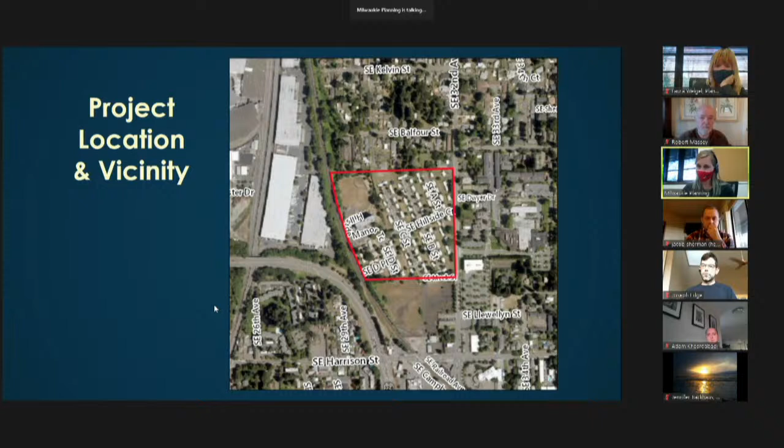The subject property is outlined here in red on the screen. It's located at 2889 Southeast Hillside Court. It's a neighborhood of predominantly single dwelling units located to the north. The campus of Providence Hospital is to the east. The vacant so-called Murphy site, the Murphy lumber site, is to the south. And the North Milwaukie industrial area, the Southern Pacific Rail Line, and Highway 224 are immediately to the west. The site is located in the Ardenwald neighborhood and is adjacent to the central Milwaukie portion of the city.

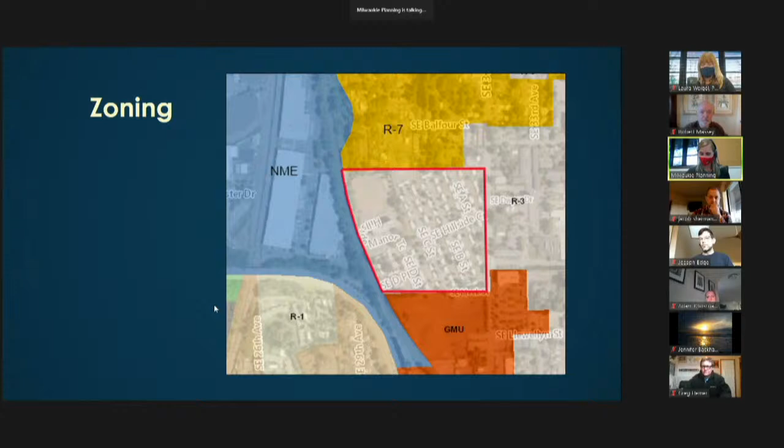The subject property, again outlined here in red, is zoned residential R3, which is a high-density residential zone, adjacent to the site of the R7 zone to the north, the general mixed use or GMU zone to the south, and the NME North Milwaukie employment zone to the west.

The proposal: this is the general master plan, site plan that was included in the staff report. The applicant is seeking land use approval to develop a mixed income community of a total of 600 units: 400 new units, 100 replacement units for the cottages that are on the site now, and then the existing 100 units in the Hillside Manor Tower, for a total of 600 units on the site. At the end of all phases of development, the applicant is using the planned development process, which allows greater flexibility in design than would otherwise be possible through the standards of the underlying R3 zone.

As described in the application materials, the existing houses in Hillside Park will be replaced with 100 new affordable units for the population currently being served on the site. Removing the existing houses creates the opportunity to develop 400 residential units that will include a mix of both affordable and market rate housing. The new units will provide a variety of housing choices. So the proposal includes walk-up townhomes in the northern part of the site adjacent to the R7 zone to the north.

And then also including 3- and 4-story mixed income apartment buildings to the south. In addition to the residential development, the proposal includes opportunities for small scale commercial and office uses on the ground floor of the buildings along 32nd Avenue, and those are identified there to the side.

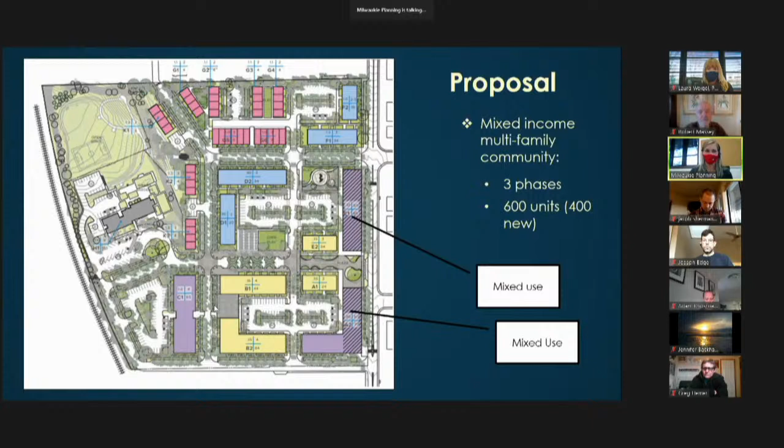The master plan includes subdividing the property into smaller lots to facilitate phased development and provides the opportunity for development of lots by outside partners. I'll get into a little more detail of that here.

So the phasing plan: the proposed redevelopment on the site will involve the phased demolition of existing improvements on the site, including removal of structures, demolition of the existing roads, and removal or abandonment of the underground infrastructure.

A new street grid and infrastructure plan is proposed with the streets to be realigned, so it's more of a grid and block system.

The phasing plan includes assisting the current Hillside Park residents with relocation into one of the new units upon completion. The first phase anticipates the Housing Authority developing at least 100 replacement units that will be leased to low-income residents.

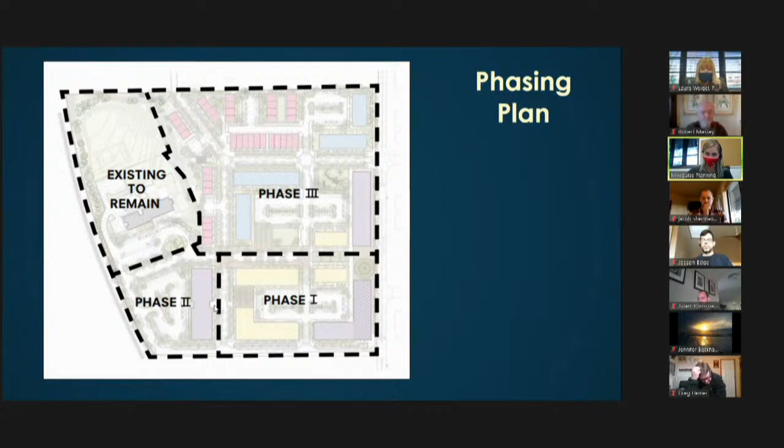Part of this proposal includes a proposed rezoning of the property. In order to reach the density goals and allow for mixed-use development, the final development plan and program includes a request to change the zoning and the comprehensive plan designation of the property.

The northern portion of the site is proposed to have a zoning of R1 and a comprehensive plan designation of high-density residential. The southern portion of the site is proposed as GMU, or general mixed use, with a comp plan designation of town center, consistent with the property directly to the south across Meek Street.

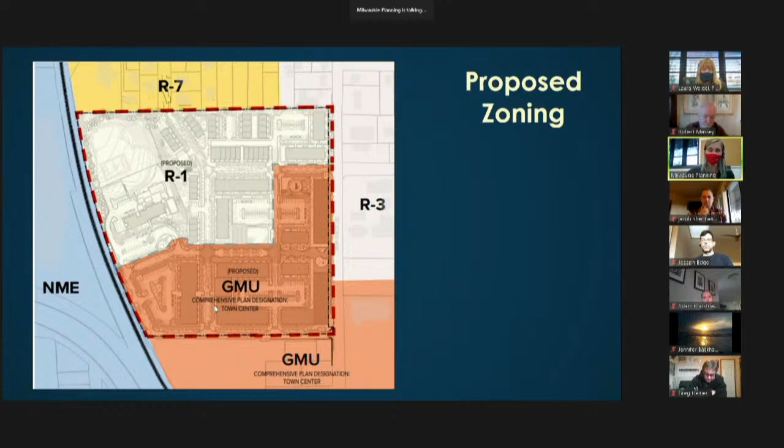So this map shows what the proposed zoning would be. And again, the current site is zoned R3, so they're proposing a split zone on the site.

The applicant is, again, seeking land use approval to develop this 600-unit apartment community with some mixed-use buildings, and they're using the planned development process.

The planned development, land use file PD 2020-002, allows for adjustments in lot sizes, lot dimensions, and some development standards. For the preliminary development plan and program, which is the proposal and the hearing that we're having this evening, is an approval in principle.

Which is what is laid out in the code in section 311. And that's required to move forward for a final development plan and program, which will include a review of the requested zone changes. So that's why we're in a preliminary planned development review right now.

As part of this review, we are also conducting a transportation facilities review. The project's impacts on transportation, both including vehicular, bicycle, and pedestrian, have to be evaluated to determine whether improvements to the transportation system are warranted.

So the applicant submitted the preliminary development plan and program, which is being processed as a type 3 application for the purposes of noticing and establishing a review by the Planning Commission.

And again, if they are successful and the commission approves in principle of the preliminary plan development, then the applicant will have to initiate a type 4 review process by submitting a final development plan along with the proposed subdivision and any other applicable reviews within 18 months of the approval.

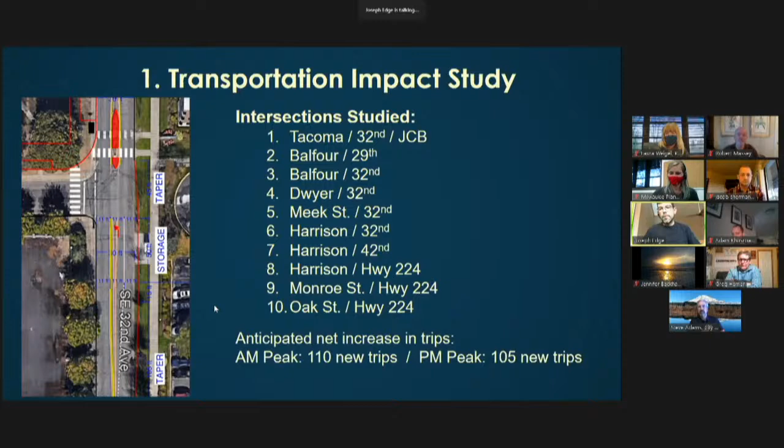Thank you, Commissioner Sherman. Are there any other questions for Mr. Adams before we move on? Okay, thank you. All right, thanks very much.

We'll continue on. The next key issue is whether or not the application meets the requirements and approval criteria for section 311. So this slide summarizes a couple of the items or features of the project.

Generally, what the applicant is seeking to do is to blend the density across the site. Although there are two zones, the R1 and the GMU zoning, the blended density overall on the site is 41 dwelling units an acre, which fits between the density spectrum of the R1 and the GMU zoning. So it skews a little bit more towards the GMU, but it's within the range of densities for both.

The proposal is, as you can see in the graphic, the higher density development is towards the south. The lower density R1 kind of development, the townhomes and so on, are towards the north, adjacent to the single unit dwelling neighborhood in the R7. Then as it moves towards the south, adjacent to the existing GMU zone, the existing Murphy site, and as you progress closer into the Harrison and 32nd Ave intersection, that's where the higher density development is being proposed.

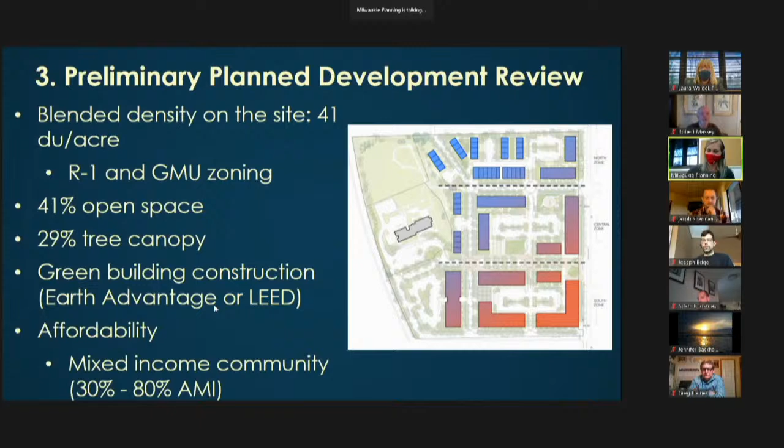So they are asking to modify the setbacks to allow for a more uniform development pattern towards the north, but they are still maintaining the 15-foot setback to the R7 zone to the north. So they would be maintaining that part. It's all the interior setbacks.

They've asked for some modifications in what kinds of materials are permitted as primary materials for the buildings, and as part of their application, they are looking to reduce the minimum parking requirements on the site, asking for an overall parking ratio of 0.8 spaces per unit, which does include the on-street spaces they're proposing as part of the overall development proposal.

There's a fairly extensive TDM program, or transportation demand management program, that they've described in their application materials, which talks about a variety of things including using transit, and they have a number of ideas about how they want to make sure that folks aren't necessarily relying on vehicle use.

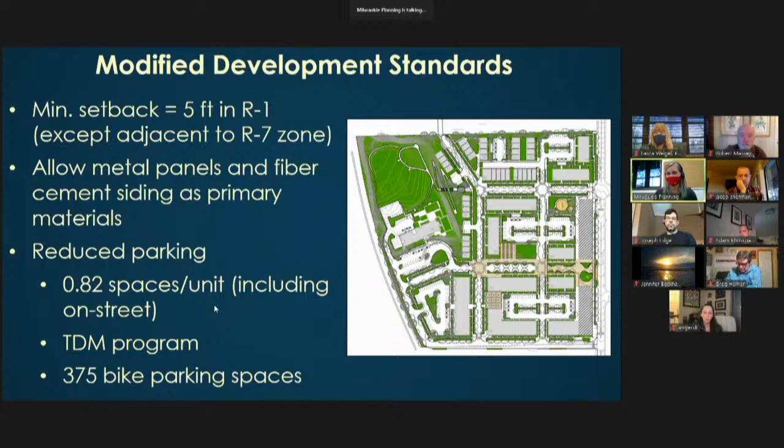And they are proposing 375 bike parking spaces throughout the development. That is less than the one per unit, but they are scattered throughout the development. So that's part of their overall proposal, a generally reduced parking ratio for the overall site.

Is the proposed amendment and the proposed project compatible with the surrounding neighborhood? So we're looking at compatibility both with the surrounding area and the land use pattern and density in the area. Is there a demonstrated need for the uses and for the project? Does the proposal demonstrate that it addresses a public purpose and provides public benefits or amenities beyond what would be provided in the base zone?

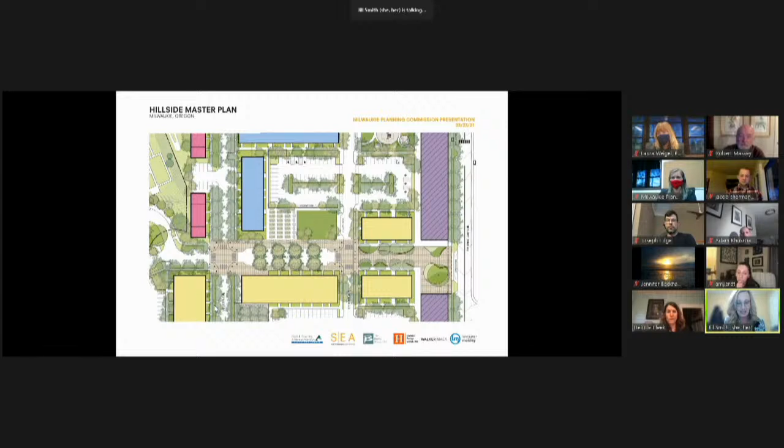And we have this amazing vision, which you've seen. I'm going to turn it over to Devin, our Interim Director of Development who works with me at the Housing Authority, to take you into a little bit of understanding the need that we're describing.

Hi, thank you for having me this evening. As Jill mentioned, I'm Devin Ellen, Interim Director of Housing Development with the Housing Authority of Clackamas County. My address is 6377 Southeast Yamhill Street, Portland, 97215.

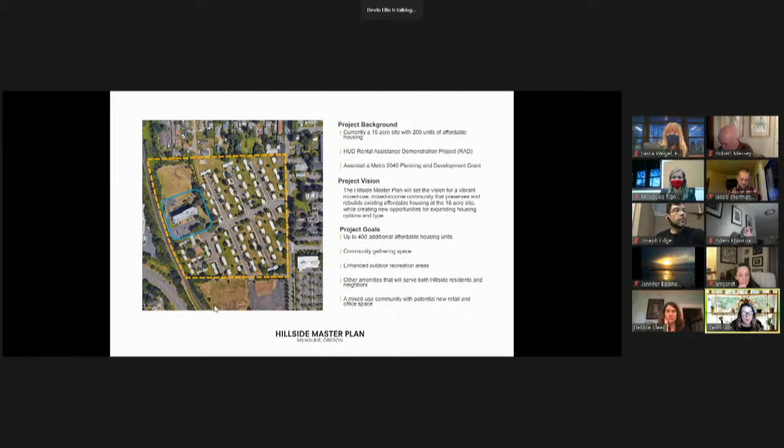So Ryan, can you advance the slide? The need for affordable housing in Clackamas County is considerable and continues to grow. The Housing Authority opened our waiting list for just 4 days last June, and we received over 13,000 applicants for only 1,200 spots on our waiting list.

According to the City of Milwaukie's 2019 Housing and Residential Land Assessment, an estimated 37% of Milwaukie households are cost burdened, meaning they currently pay more than 30% of their income towards housing costs. 27% of Milwaukie's renter households are severely cost burdened, meaning they pay more than 50% of their monthly income on rent.

According to data compiled from the county's 2019 Regional Housing Needs Analysis, over the next 20 years the City of Milwaukie needs nearly 700 new rental units affordable to households at 80% of the area median income and below. That equates to an annual income of $59,000 or less for a 2-person household. Countywide, we need an estimated 10,527 new units. All that to say, the need for affordable housing in Clackamas County cannot be understated.

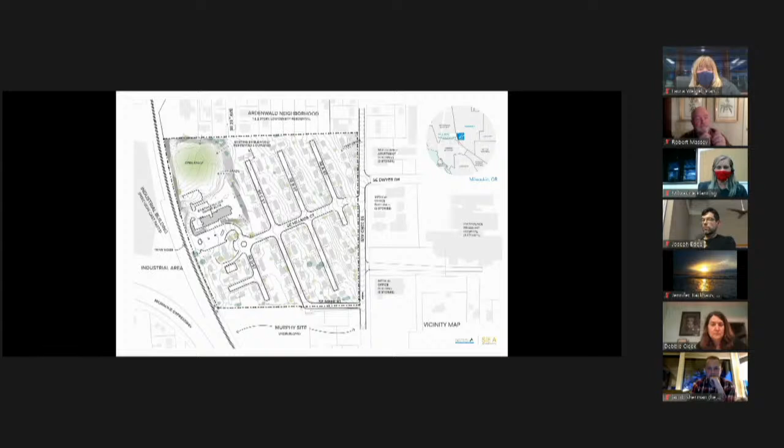Just a brief overview of the site. We're here at our Hillside Manor, on a rotated grid. We have the Ardenwald neighborhood to our north, Murphy to the south, industrial to the west, and Providence along with some multi-family apartment buildings and medical office buildings to the east.

The existing conditions of Hillside are this: we have a rotated grid that runs east-west across the site, with small houses in the park. Utilities are a mixed bag - some run along the streets, like the gas and electric, domestic water. However, the sanitary sewer runs in between the houses, and that was one of the existing conditions that presented a challenge to developing the site. We quickly realized we couldn't use the existing utilities, so a full redevelopment of the site was necessitated.

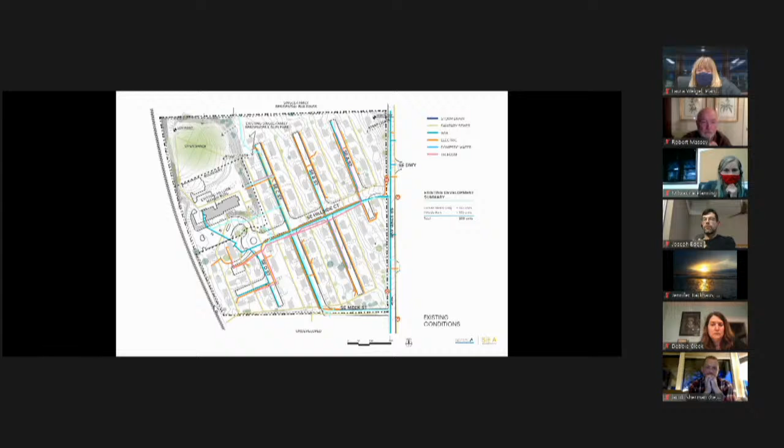So then we arrive at our master plan. The master plan is a really great opportunity to redevelop this site. The first item is that we're providing 3 times the amount of housing units that are currently supported on the site - there are currently 200, and when this project is completed, there will be 600 on site.

The other feature about this is that it is a planned development. If this site were left to be developed without this intense coordination of all the different buildings, spaces, roads, and utilities, it likely would not be as pleasant to be in, and it would be very much uncoordinated. So by using this planned development process, we really capitalize on the highly coordinated act of getting all these different project types and buildings to work together in a cohesive urban fabric.

One of the things that is really great about this site is that it does reintroduce the grid back into the city fabric. That provides easier, safer connections at intersections, and it's easier to manage and navigate for people walking, driving, or biking as well.

One of the great things this plan provides is a variety of housing choices for people that were not there prior to this plan. The pink buildings you see are townhouses - they're meant for families, low density, small buildings, and really relate well to the development of residential to the north that's already existing. The blue buildings are walk-up apartment buildings, they still have a residential look with gabled roofs and everything, but have more density.

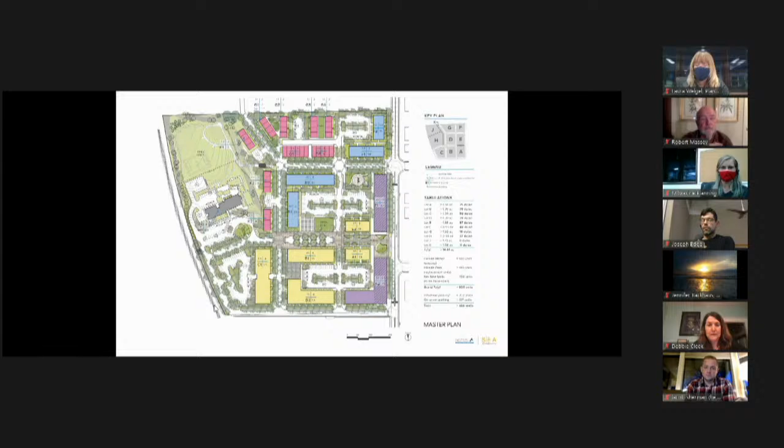As Debbie mentioned, our strategy is that these are all public streets, therefore they divide the lots up into different parcels that can be developed by individual developers. They're still held to the master plan form that we've shown earlier.

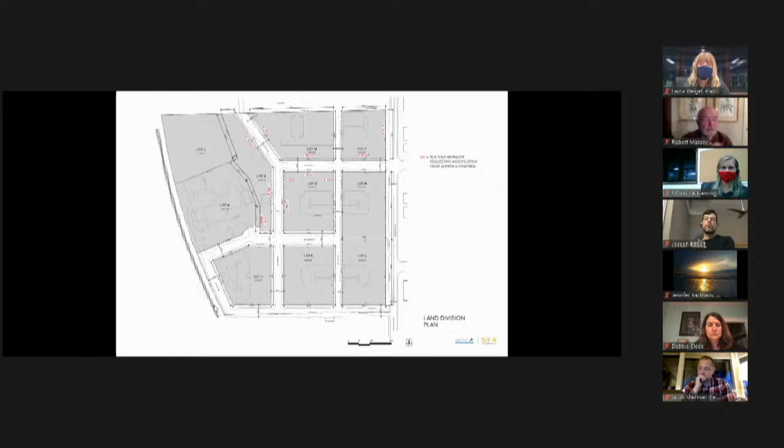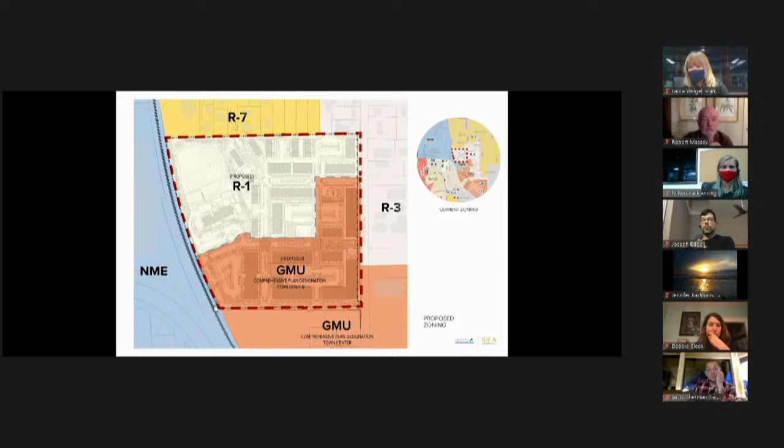We're also proposing to split the site, as you can see here, to the north and have the R1 zoning adjacent to the R7. And that supports our density in that zone.

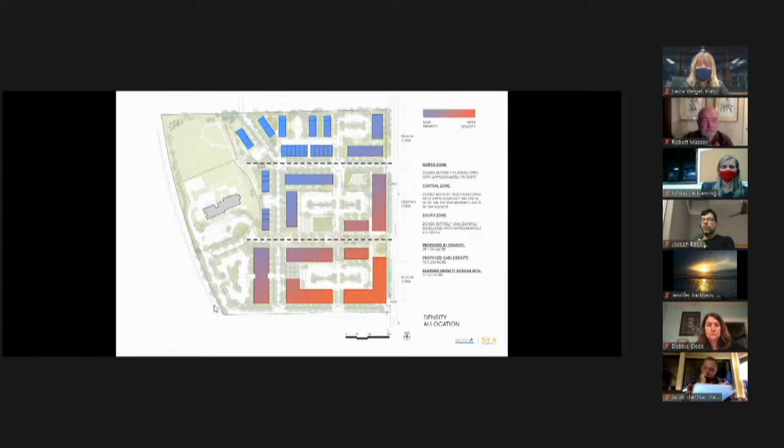It also supports some of the sustainability goals the city has, such as including a 40% tree canopy citywide, and we took that mandate and applied it to our site. So some of this open space is there to support the amount of trees we're going to include on the site to meet that goal.

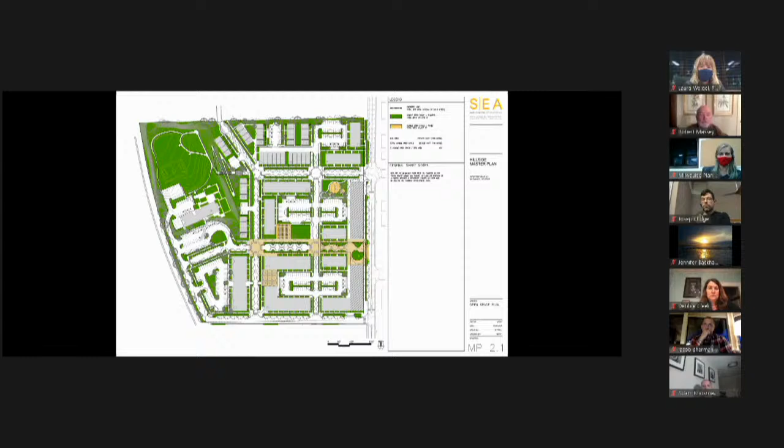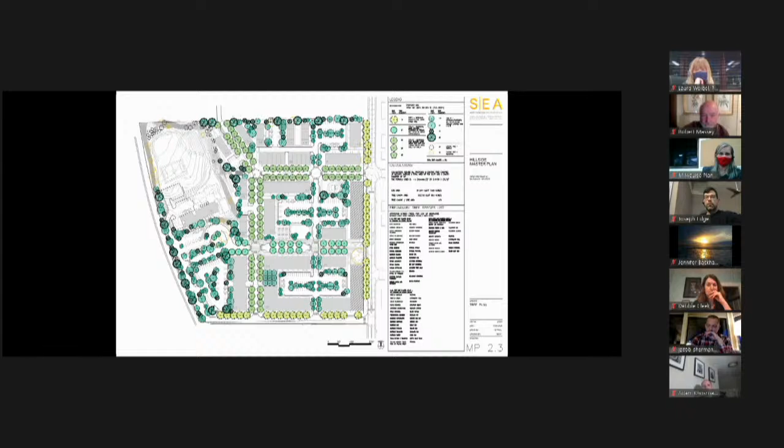In the parking fields, those are unique in that they're not limited to one species of tree—there'll be several different ones, so we encourage a more diverse culture of trees there rather than a singular monoculture. We're doing a lot to promote a place people will feel proud of, and these trees will be maintained by the city, so they'll have to meet standards for the width and size they're intended to be.

There are alternate options for developers who say they can't meet the stormwater requirements. They have the option to submerge a detention system underneath the parking field behind their building.

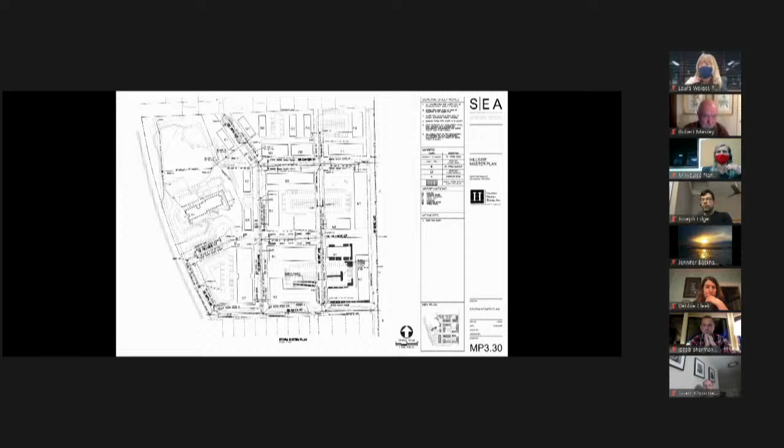And while I'm here, I'll clear up that we made an error in the application—there is no intended bike lane on 32nd Street. We did, however, dedicate a large amount of property in the right of way to include parallel parking along 32nd Street, and we do have a wide planter there and an 8-foot sidewalk. I just wanted to clear that up.

One other great thing is the amount of public improvements on this site. As Steve talked about before, we're upgrading the 32nd and Meek intersection to include a left turn lane, which will reduce northbound traffic frustration on that street, something we've heard a lot about in comments. These are all new roads, all new public roads, curbs, and utilities—a tremendous benefit to the public. Also, the introduction of the grid back into the project will make those intersections safer as well.

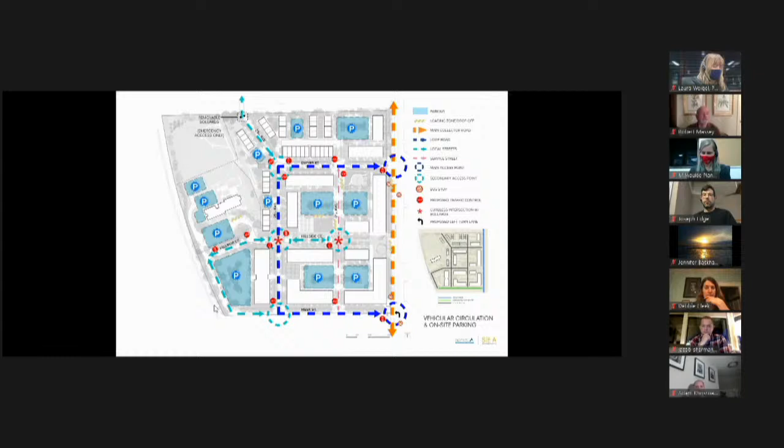So we've made specific turnouts for those places to happen. They're never reserved, they're first come, first served, but they are dedicated for that purpose.

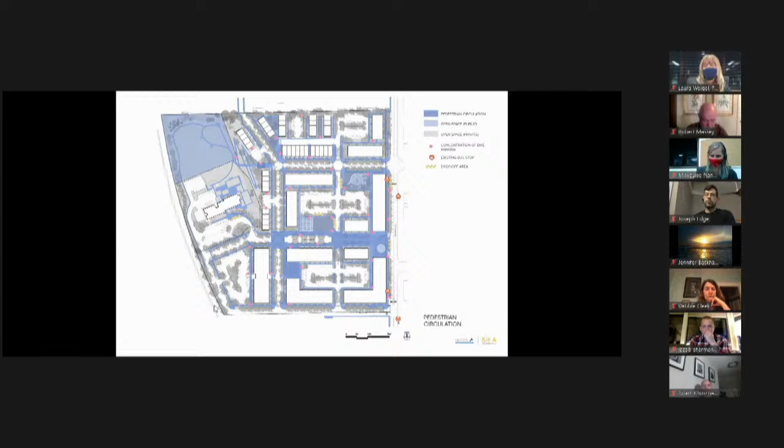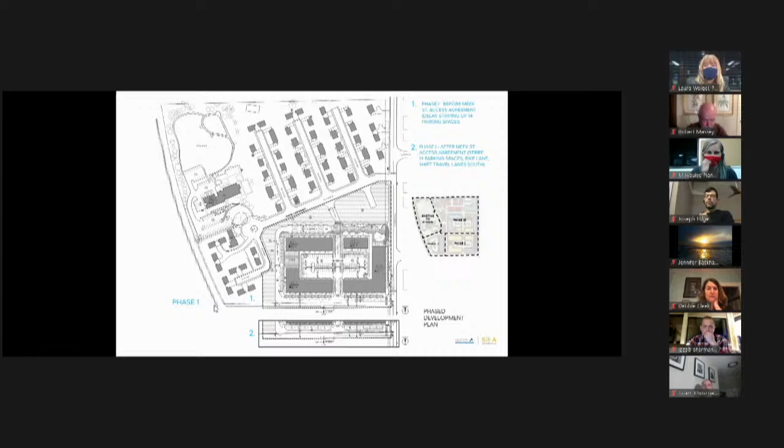Briefly, the way this master plan works, it allows us a lot of flexibility in the phasing. In the first phase, we can possibly sell Lot A for the capital improvements we need to make to the site. Lot B is the replacement housing for residents in the park who are being displaced. Then we can make a clean break to the Hillside Court up at the north part of this diagram to allow some flex between phase 1 and when phase 2 or 3 starts, because we know there are some options available for which buildings happen in phase 2 and 3.

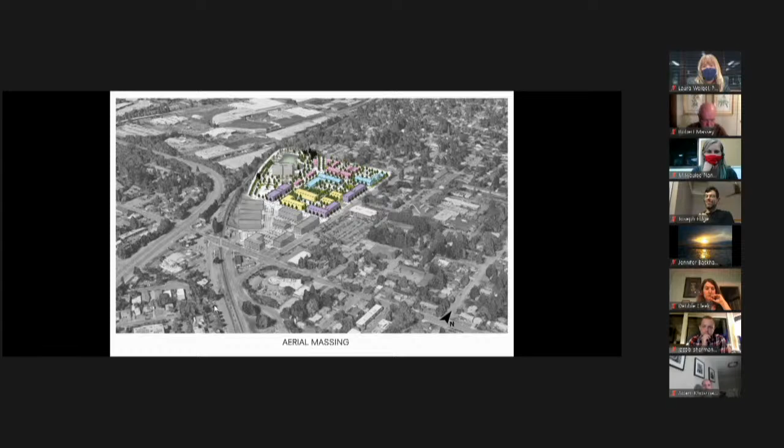Now I'll turn it over to Debbie, who's going to talk about some of our anticipated modifications that we'll be requesting. Thanks, Ryan. We'll go through this pretty quickly because I know you want to move on.

But this is a conceptual approval, and because of that, we want to use this opportunity to have the commission weigh in on a number of key aspects of the master plan to make sure we're headed in the right direction. As Vera mentioned earlier, we're requesting several modifications to the development standards of the code to make the master plan happen, and we want to zoom in on a couple of those and discuss them in detail so the commission has a good understanding of what we're proposing.

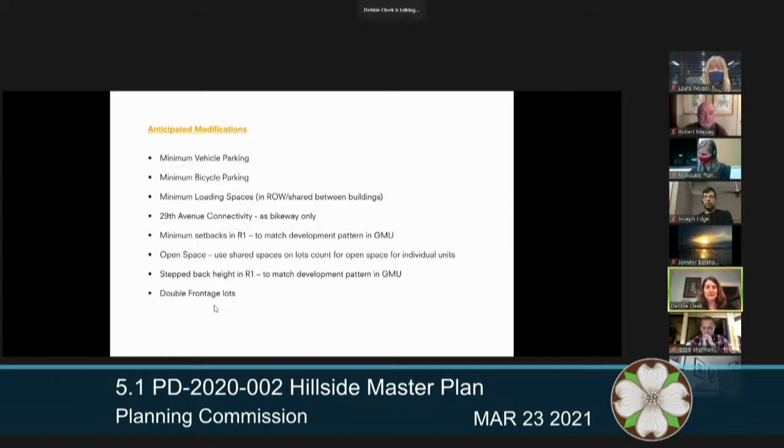We're going to look at the minimum vehicle parking, the minimum bicycle parking, and the 29th Avenue connectivity. Next slide, Ryan.

On the vehicle parking modification, the goal is to provide adequate parking without overparking the site and taking away a lot of the open space that's a real amenity to the site. So we've looked at several different ways to reduce the parking below what's required by the code minimums.

Some of those are reductions that are by right, which is that the Hillside Manor is vested with 59 existing parking spaces. Also, the entire site is located close to public transit, which gives us an automatic 20% reduction across the site. But then the modification we're requesting is to look at other mechanisms to reduce the number of required parking spaces.

This includes compensating for the fact that it's affordable housing. The ITE, which is the transportation engineers' go-to, has a 25% reduction for affordable housing.

We're also looking at sharing the parking between the commercial uses and the residential uses because they have opposite peak hours of use, so they make a nice complement for each other. There are also 137 on-street interior parking spaces within the development that we'd like to have counted towards our parking minimum—that would include all the parking spaces except on 32nd Avenue. We've asked the city to consider having the spaces on 32nd Avenue signed for short period parking, like 2-hour parking, so those would be more focused towards commercial use and less for overnight residential parking.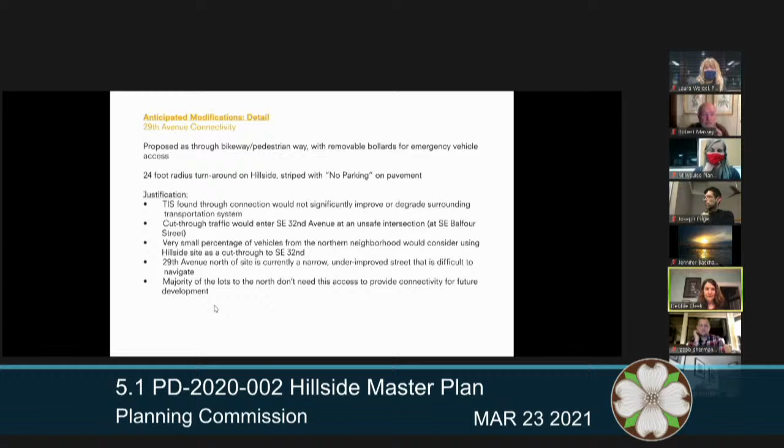Oh, I don't think that's the right slide. Well, anyway, I will just use this slide.

The last thing we would like clear input from the Planning Commission on is that we are headed in the right direction with the zoning and the comp plan designations and the density we've proposed on the site. If you remember the zoning slide, we're doing GMU on the south half of the site and R1 on the north half of the site.

We feel these zones are compatible with what's going on in the existing area. There isn't one single strong character of this neighborhood. You've got industrial to the east, medical centers and commercial uses to the west, GMU zoning on an undeveloped site to the south, and single family residential to the north. So it's a site that pulls all these disparate uses together.

We think the zonings we've picked take into account that there's a lot of different things going on in this neighborhood. It's also consistent with the Central Milwaukie Land Use and Transportation Plan that was recently approved. Our site wasn't included in that plan, but it did include the Murphy site and added GMU zoning to that site. So we think having more dense units on the south part of our site will fold in nicely with that plan.

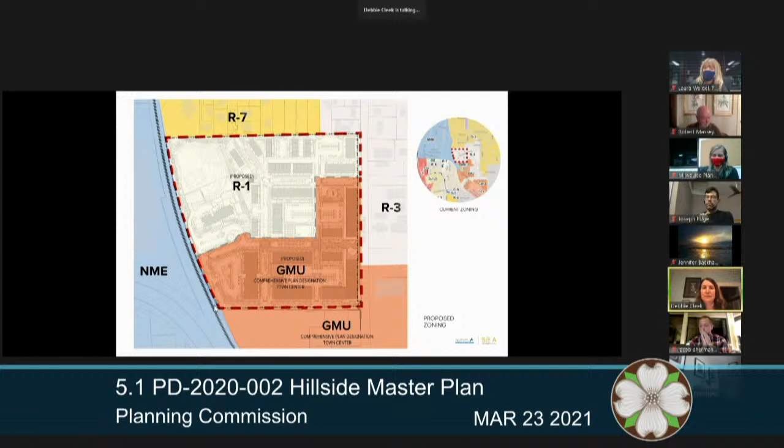So that pretty much concludes what we were hoping to have your input on, and we're looking forward to hearing your discussion.

Are there any questions from the commissioners for the applicant's representatives? Commissioner Khosroabadi.

Thank you. I appreciate your time and your presentation. Very well done, and I like the design of this building. A couple questions I had, and I know this isn't in the plans right now, but just thinking forward, the potential for solar on the buildings to make this building even more efficient and self-reliant, is that something that's been tossed around or thought about for future plans?

And then I had some questions on the spaces, the 375 spaces for the bikes. You mentioned there's still an ability to increase after that, right? That's not the cap, is that correct?

I can answer that. It's the minimum, and that's what we would like to start with. If and when we see that there's a need for more bike parking spaces, once the bike network is built out, certainly more spaces could be added onto the site. But we do want to leave room for a bike share program because we think it's really viable, and if we max out on the minimum, the bike share program spaces wouldn't count towards the minimum. So that's sort of what we're going for with that.

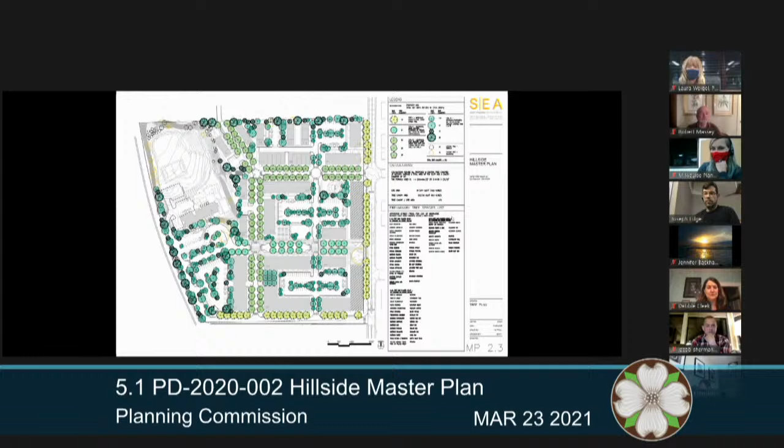Okay, I'll take it. Let me get to the right slide. Here we go. This slide shows these little areas here, which are the green planter areas. They happen all along the street. There's a little diagram down here, I'll zoom in if I can.

Ryan, it looks like I have speaking privileges now. Oh, great, it's Christian.

Hi everyone. So we are currently showing 2 different options that could get imposed on any of the development phases. We are showing stormwater planters, surface vegetated facilities, or underground detention. It just depends on each site, how much site area is available, and how we are going to meet the City of Milwaukie Stormwater Code at the moment. I don't know if City of Milwaukie has intentions to adopt the new 2020 City of Portland Stormwater Code or not, but at the time of this master plan, we were meeting the 2016 Stormwater Code from City of Portland, which has been adopted by City of Milwaukie. There is also an option to investigate the use of dry wells, which would probably be the most efficient use of space and would lessen the burden on the public facilities. That would be another option investigated at the time of each phase's development.

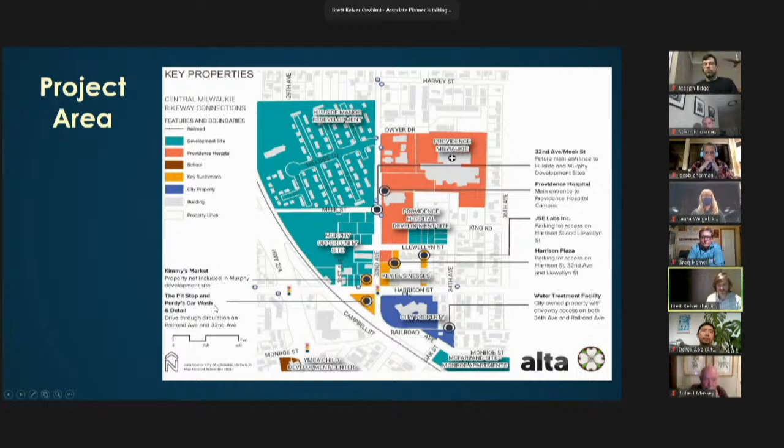There were three routes we've been looking at throughout this project. The one we're describing as the base case is the one in purple, on the farthest west edge of the area. That was a route identified more or less in our transportation system plan and also in concept in the Central Milwaukie Land Use Framework Plan.

We also identified two other routes we want to look at. One was focused on 32nd Avenue, and the other was a detour through Llewellyn Street and 34th Avenue.

You may recall that initially the materials we put out labeled these as options 1, 2, and 3. We decided to change the labeling, hopefully avoiding some confusion, because we thought it was important to clarify that the base case route was the one in our earlier concept plans.

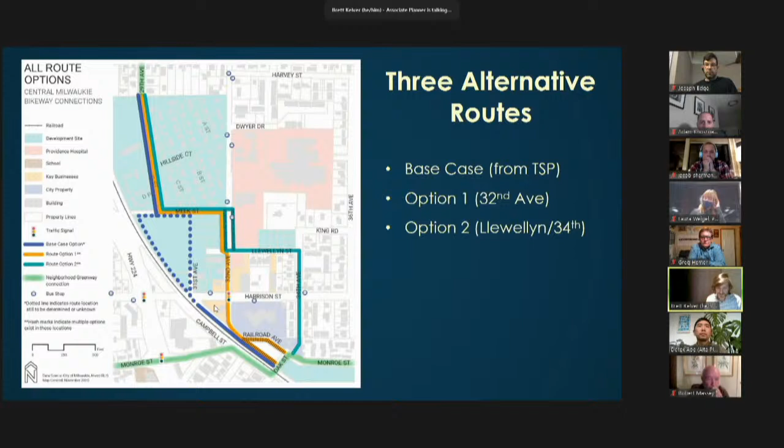The reason for this project was because we recognized at some point that it was not going to be as easy as we originally thought to make that route a reality. So we decided it was fair to indicate that was our starting point, the base case, and then to identify these two alternative options.

Just to set us up for a little more discussion that Derek can lead us through: you'll recall we talked with you and the City Council in December of 2020, and then we jumped into a couple of engagement opportunities with the larger public using our online resource, the Engage Milwaukie page.

After that we had a lot of conversations with the folks we've identified as key stakeholders, that is the property owners of the different key redevelopment properties and businesses in the area: the Murphy site, folks from Providence Hospital, the Hillside, and the County Housing Authority, the Harrison Plaza.

We fired up the Engage Milwaukie page and presented a survey where we wanted to present these different options and ask people some questions about that. Some of those results are summarized in the staff report as one of the attachments there.

We also, of course, were tracking feedback from the key stakeholders. We presented a revised version, a refined draft of that conceptual design report just last month in February, and provided an opportunity for some online engagement. At that stage we were showing the community the recommended route, which we'll talk a little more about this evening, and soliciting some more comments on that.

If you'll recall from your own discussions and what we heard from the City Council, as well as a lot of the public who responded, especially in the initial online survey, there was a lot of interest and support for that base case option.

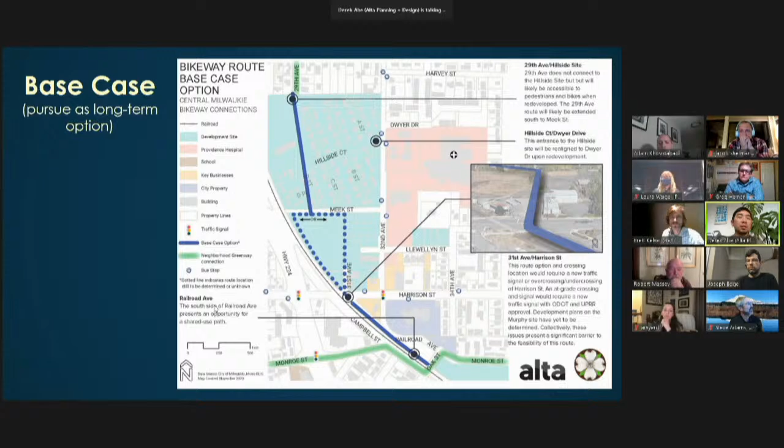Yeah, I think that captures it well. In addition to the likelihood of having to acquire some right of way on the south side of the intersection, we're likely going to have to do that to the north as well. The city has an agreement in place with the Murphy developers to provide an easement for something like a pathway along their frontage of 32nd, but that does not extend all the way to the intersection. Kimmy's Market on the corner still provides challenges in a lot of ways. The right of way, curb to curb, is very narrow, and in order to provide the level of comfort or separation we would want at that intersection, it would require expanding and widening it out.

Currently what we've heard about this intersection is it's really busy and congested, with a lot of vehicles moving through it. But it's also very complex. There are a lot of driveways and turning movements, sometimes unpredictable, happening in and around this location. So there's a lot of work that would need to be done to improve the intersection itself, and then thinking through what the appropriate bike facilities would be north and south of that point.

One specific example of a liability with 32nd is a very common movement: southbound traffic turning right to get on Harrison. So you've got this classic right hook problem where a cyclist is waiting to go across, and someone making a right turn on red is ready to go after waiting, creating an immediate conflict. It's not unresolvable, but it's not a great setup from the start because of a very common movement that wants to happen at this intersection.

And if I'm not mistaken, that's also one of the reasons why there isn't currently a pedestrian crossing there. The crosswalk is closed. Exactly.

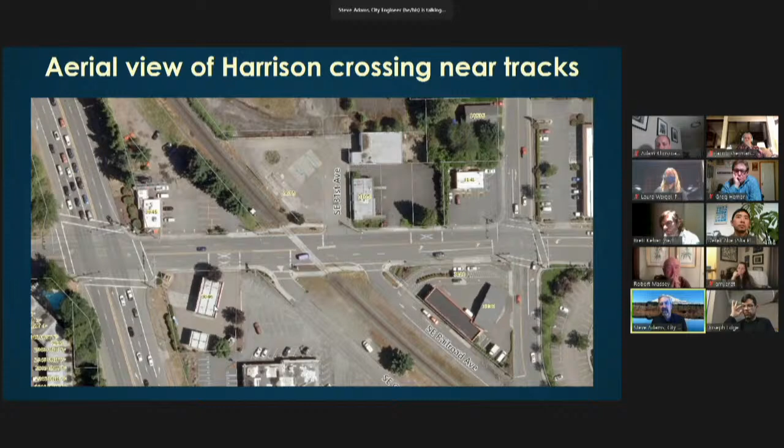The other concern I have is that if we make the official path go across Llewellyn and 34th, that's what we're recommending people to do. A bold cyclist could still go down 32nd and run across the intersection, but if we make that our preferred route and someone gets injured, we put ourselves in liability because we've created what could be an unsafe route—I'm not sure which crossing is actually safer, 34th or 32nd. I've heard early reports that 34th is bad because it's at the bottom of a steep hill, and cars tend to pick up speed there.

I suggested a pedestrian refuge island in the middle. I've used that before as a safe place to wait if traffic gets too heavy, for 30 seconds or a minute or so. But 32nd and Harrison is a really busy intersection, and to make it bigger, to expand it, I'd take a rough guess at $1 million plus—just relocating the traffic signal poles is probably $400,000 to $500,000, plus any other hard work involved. So it would be a tough go on that one, in my opinion.

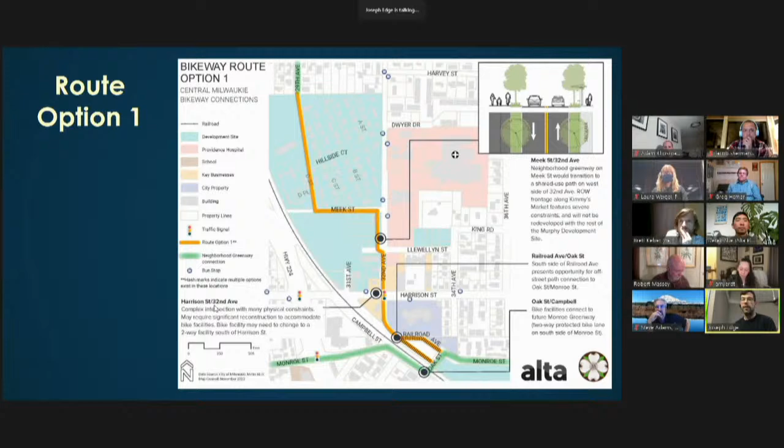Okay, I'll jump in with a couple comments of my own. It'd be really nice to have the political will and financing to put in a primary bike route that feels safe for a 6-year-old or an 86-year-old to ride, that is destination-oriented and actually takes you to the places you want to go in the neighborhood, rather than winding you around. You'd still have to figure out how to get from the bikeway over to 32nd to go to Kimmy's Market, and if that's your destination, we want a bike lane that's protected and safe that goes there. It'd be really nice if we had the political will to pull that off at some point, although this might not be it.

I certainly don't support an overpass. An underpass might be impractical, but we do kind of need both kinds of facilities—one that's a bike highway, a throughway allowing through traffic to get from the future North Clackamas Greenway along Railroad Avenue up to the Springwater Trail. There are going to be commuters who want that, who might want an underpass to bypass traffic on Harrison and go through the back way—they're not going to these shops, they don't care. But people in the neighborhood need to be able to access destinations. If we're asking them to use their bike instead of their car, they need to be able to use their bike to get there. We have to stop winding everyone around the destinations we know they want to go to. With that said, option 2 is probably the most practical for now.

What I would say is, let's really look at that treatment at 34th and Oak and make that a gateway to the Ardenwald neighborhood, and make it feel inviting, so bikes go here and it's not an afterthought. We're not winding you down some dark alley between buildings and a railroad track, but inviting you into this bike corridor that's safe, with traffic calming treatments on Harrison at 34th and maybe even diverters that prevent turning movements onto 34th by motor vehicles. So you can feel safe on 34th Avenue with your 6-year-old or your 86-year-old grandmother, and these are important considerations.